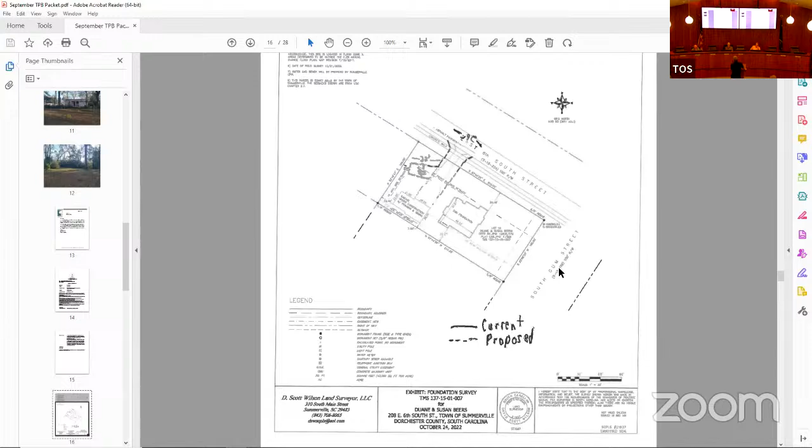Mr. Chairman, we looked at every possibility of saving trees there, and the pine tree in question is pretty large, and at first glance it appears to be healthy. But on studying the canopy and the branch attachments, and in the central leader there seems to be about a 6-foot long stretch of darker material, which I think is decayed wood. So consequently, I think that tree needs to be removed, and the other requests are also in line with the guidelines of the town. So I move to approve the removals as requested by the applicant.

Any other comments? I think initially wasn't the live oak also requested for removal, but we talked about that and it's just going to be trimmed. Was that part of the initial request? I'm not sure about it, I don't have it in front of me. The live oak was not part of the original request, it was my recollection.

You weren't asking for the live oak to be removed? No, there's another oak that overhangs and has a couple dead branches on it that I'm going to just trim, clean it up. Okay, I'm good with removal on the pine tree. Had a second? Second. All those in favor of the motion say aye. Aye. Opposed? You may remove the tree. Thank you.

214 Smythe Drive. A representative here for them? I didn't see the tree. Would you go ahead and describe it?

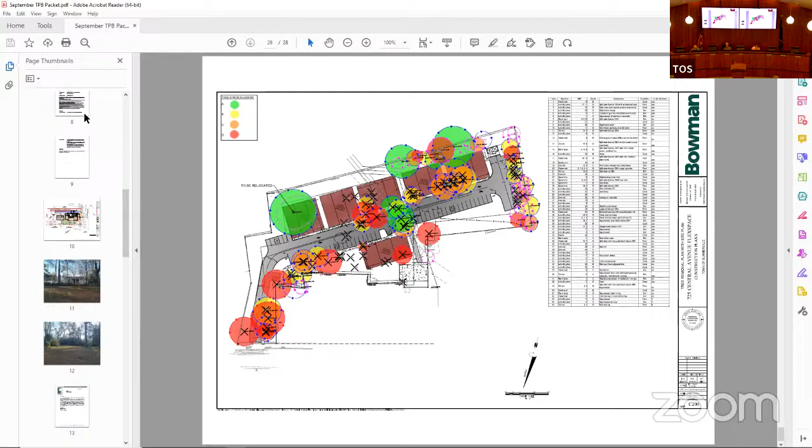Okay, now we go to old business, 306 West Richardson. And I know we have multiple iterations of the plan. We've just received some this very minute, which makes it difficult to deal with adequately in a short time, but we welcome to hear any discussion about the changes and the proposals that you have.

Good morning, I'm Rachel Burton from Swallowtail Architecture, and I'm the architect for this project. So we've had a lot of meetings over the 9 months, but it's actually started well before that, trying to move forward with the drainage layout, the architectural design, and of course what trees we can get approval to remove. And although each of these are independent, they are all interconnected. And because this site is unique, I want to talk a little bit about how we've resolved each of these pieces up until now and where we are as far as what that means for the trees.

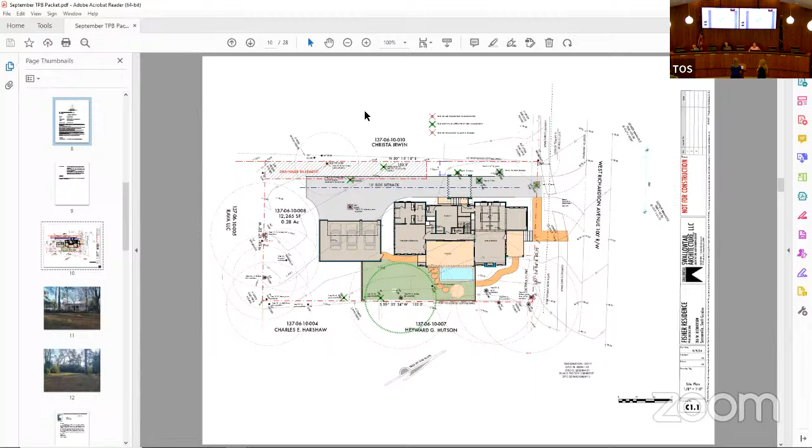So that's one of the reasons for our concern about the pipe. I mean, we're fine with a pipe for drainage to get water off the lot and everybody be happy. But what's those two trees that are right there in the easement?

Well, it's off to the upper side of the easement, the live oak is right there. That's the one we're probably most concerned about. So we were wondering, was there some approach we could have to save that tree? There'd be disruption, of course, but rather than outright removal, is that absolutely necessary for the installation of the pipe? That's one of our principal questions, I believe.

Yeah, we even talked about it, I think you'll note what we've said is that we want to save that tree. But at the moment we don't have enough information to advise on the actual drainage plan, how big is that pipe, how deep. But either way, our intention is that that's a tree we'd like to save. We have noted it as such, not as a straight 'yes, please remove it.'

And the other trees in that area were advised to us as being in poor condition or an invasive species, and that we can and should ask for those to be removed, and so we have.

Yeah, I think we even talked about the live oak, finding some way to go under the root system there. I don't know if that's a possibility for stormwater to do something like that. If you're talking that side, a big pipe, I think it would be tough to do, but you know.

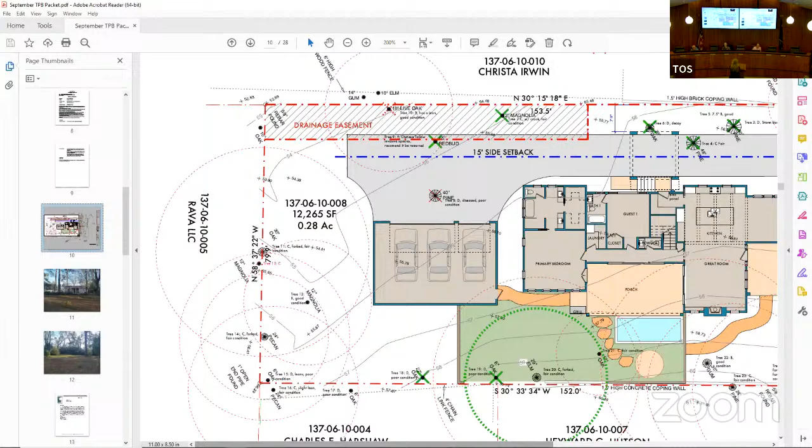So the best way to word this motion, if I make one or you make one, is to include the number of the tree numbers that we do approve to be removed. And to me, with the discussion about the live oak and being stuck between a rock and a hard place with tree commission and the engineering department, as far as the need to remove it.

There is tree number 8, which is requested, and that request stands. Tree number 4. Those are the only two I think we would consider removal of. Correct me if I'm wrong, folks. So you said 8 and 4?

8 and 4. But what about the 40-inch pine? That's in the middle of our driveway, right? That's beside - tree number 8. That's tree number 8. Oh, by the garage, that's tree number 8.

I thought he said that tree was actually the live oak. No, the live oak's way up top. I don't know the number. I need my glasses, but you pointed to the live oak up top there. Oh, there's also tree number 3.

Let's talk about tree number 3 for a second. We're going to do this tree by tree. That's the one that was claimed to have storm damage. It's a big pine.

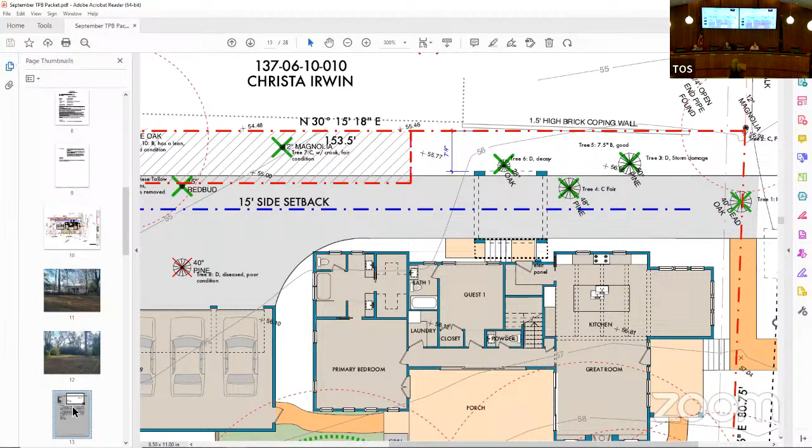Justin, your assessment on tree number 3? I believe I had a C grade rating on it. There was some damage, it wasn't a perfect specimen tree. I think the arborist report was a little harsh on that tree as far as grading, but I graded it more as a C grade tree with some structural issues. I recall the top being blown out.

Yeah, that's right, storm damage. It said it might have been hit by lightning as well. I'm trying to recall if I saw any kind of a streak going down the side. We didn't see a streak, but we did notice that the top had been damaged. I don't have any problem with that one personally. I hate to see it go, but you know where I stand on that.

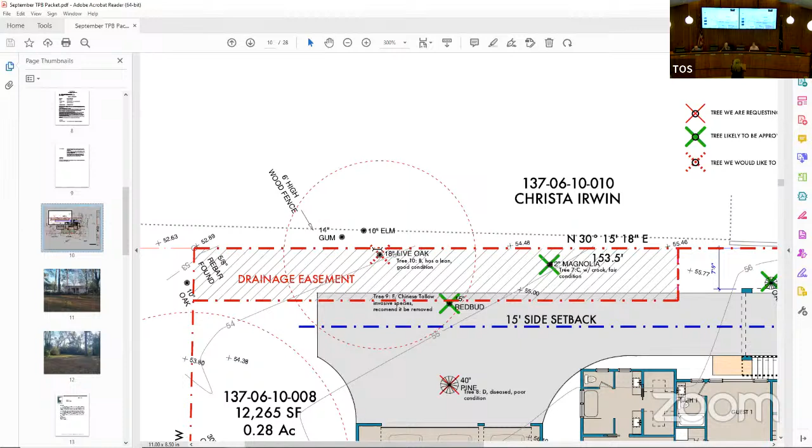So the trees we are actively considering are tree 3, 4, and 8. And I guess our hands are tied on the live oak, which number I can't see. What's the number of the live oak tree? And that's sort of in a different category.

I hate to see that big pine tree come down, but I really appreciate everything that you all have done in terms of accommodating everybody else, particularly the difficult task of accommodating root protection zones. And a lot, as you pointed out, is one big tree protection zone when you look at it. So anyhow, I'm repeating myself.

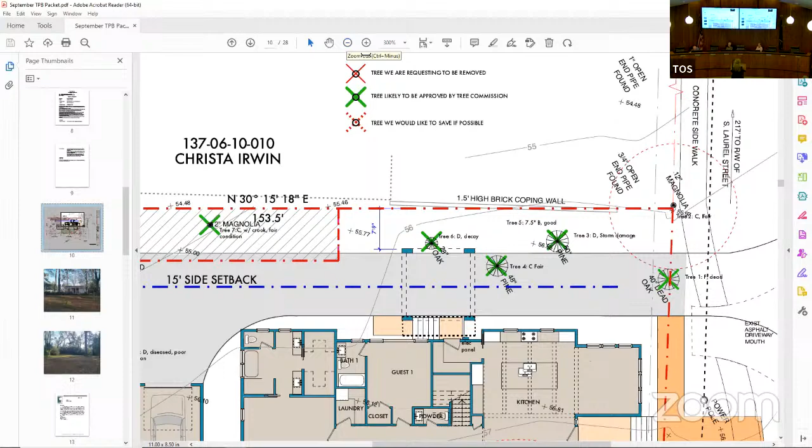You ready for a motion? Yeah, let me try this as a motion and see what happens. I move that we approve the removal of trees 3, 4, and 8, and that if the drainage easement cannot be constructed without putting the live oak, tree number 10, at severe risk, then give the arborist the approval to grant that tree be removed. I'm saying that only so we don't have to have a second meeting. I second that.

Any more last minute thoughts before we vote? No, sir. All those in favor of the motion say aye. Aye. Opposed? Motion passes. Thank you very, very much. Thank you for the hard work and good thought, and to the applicant as well. Great job.

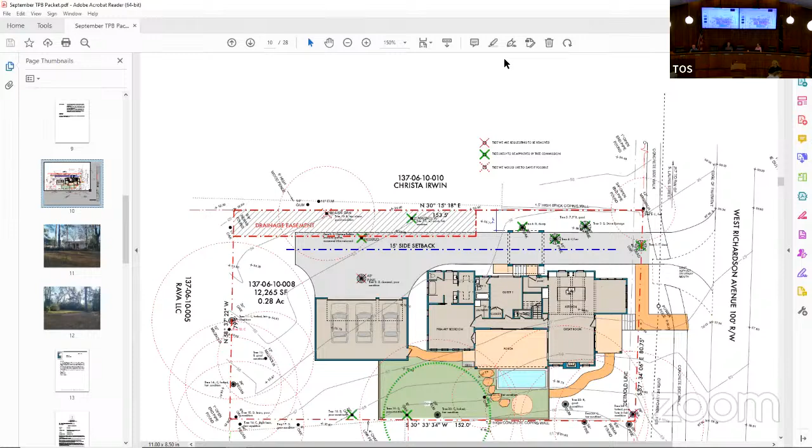Mr. Hutson. I don't have a clear understanding of the trees that are to be removed on the property line that I share. None. There might be, they're not even at the corner, which is on the street corner on your property side, at one time was speculated to be removed, and it's just not. The only trees are on the other side, all away from your property line. And much effort has been made to protect the root protection zone of those very same trees, particularly that elm tree.

I know that people who have not lived here for a long time want to cut down the pine trees, but I tell you, it's been my experience that when those big pine trees come down, they actually create a sinkhole that's very difficult to deal with. And I think we should make more of an effort to maintain and retain those grand pines, because they live a lot longer than people think, even in damaged condition.

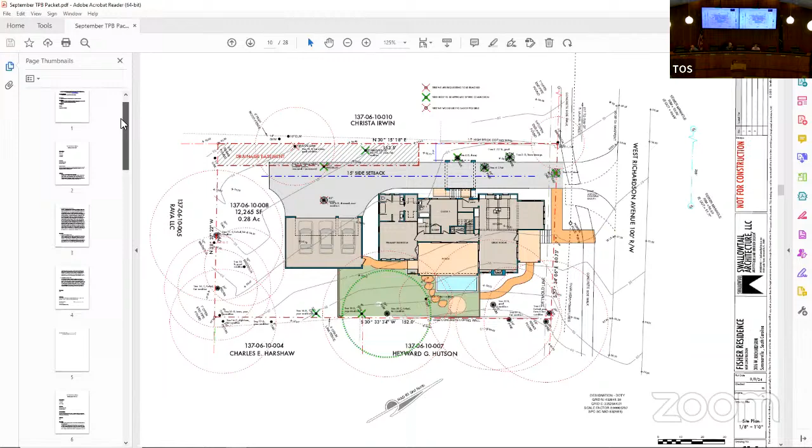Any other items of business, questions, last minute thoughts? Yeah, I had a question. I was just looking over the agenda, but on new business number 2, Smythe Drive, were we supposed to do any kind of vote on the Willow Oak, or was that already approved at staff level? That was approved at staff level. I guess technically it would have been reviewed again by you. Yeah, it does need a vote. Once it comes to tree board, it overrules the staff level review. Stuff that has been approved at staff level, you just have to reapprove it. Good job, Roy.

I move that we also approve, at 212 Smythe Avenue, the removal of a willow oak in addition to the removal of a sweet gum. Second. All those in favor of the motion? Aye. Opposed?